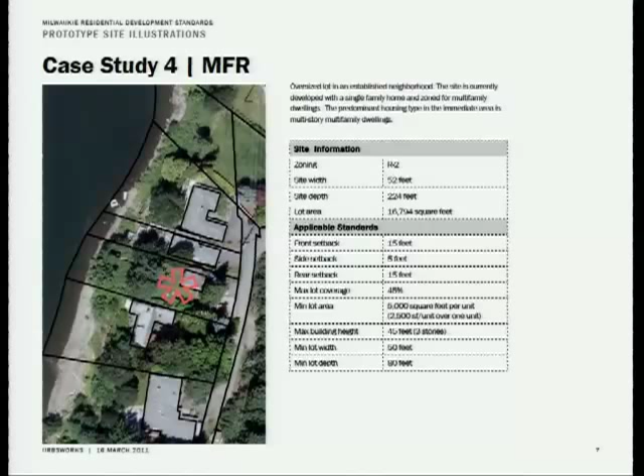The first part of the 4-part exercise was we showed what would happen under the existing code, and we modeled it in a very simple graphic way. We chose several sites subject to multifamily residential zoning right now. These were actual sites, but we attempted to genericize them a little bit so people wouldn't know it was their property. We laid out the zoning code standards, the setbacks, the heights, the FAR, and then we modeled that just to show people exactly what they might see on their neighboring property under this zoning.

Given that this is a community with a lot of multifamily zoning, it hasn't been taken advantage of. It was part of that wave of multifamily rezoning that happened in the 60s and 70s, and it mostly still has single-dwelling detached homes. So when people realized what the existing zoning code would allow, it was upsetting. But that was actually part of our strategy, to show that there needed to be more care, some amendments to their zoning code for multifamily dwelling.

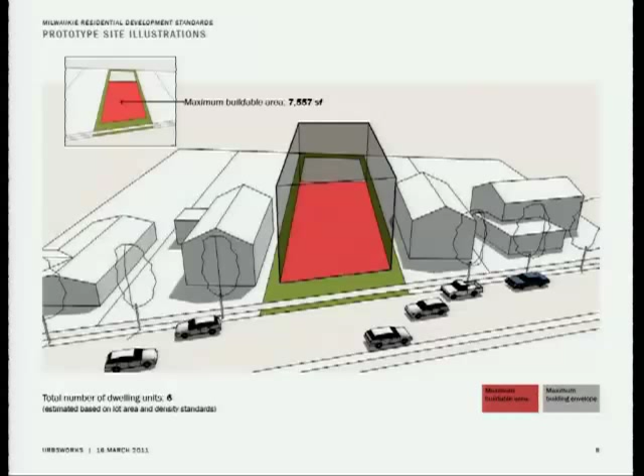And we did this on a number of sites. I'm just going to run through these quickly. You can see how big and bulky these developments are. One subtlety about the drawing is that the red, or salmon-colored area represents the maximum buildable area. But in the worst-case scenario, from a bulk perspective and incompatibility standpoint, there's nothing preventing the development from actually reaching into the back of the site area as well. That was something we wanted to make very clear. So the incompatible bulk and height, and perhaps the unrealistic setbacks, were all quite helpful for people to see.

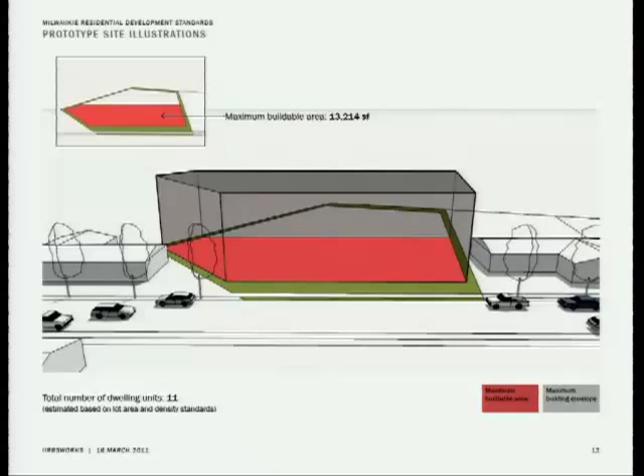So the second part of the exercise is we illustrated some alternative housing types. These are really housing types that have emerged over the last couple of decades. I think most of you are familiar with these, but a lot of people who think of multifamily housing zones think just of apartment buildings, stacked flats. They don't think about opportunities for row houses or cottage clusters or other newer options that new urbanists are actually quite good at designing and getting built.

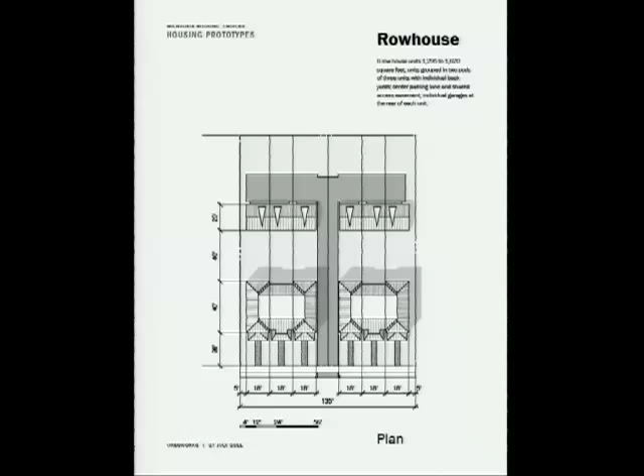So we took one of those subject sites that we had illustrated before, and then we showed what it would be like if we put row houses on it, and we were attempting to achieve the maximum density allowed, which was 8 units. The row house model didn't meet that, but that's kind of an issue with the row house model.

The cottage cluster, which is a new type of housing, there's a company out of Seattle, Washington called the Cottage Company, which has popularized a code model that's been adopted into codes by several Northwest cities, including Bainbridge Island, Whidbey Island, and parts of Seattle, and we wanted to take that model. It's a really easy to like kind of housing type. It generally doubles the density on a typical residential lot, but it does it in a way that is small and compatible with lots of green space. It's kind of for the apartment dweller, the person who might not want to live in an apartment, would rather have a garden, but wants a small house. These are generally required through the Cottage Company's model ordinance to be under 1,000 square feet.

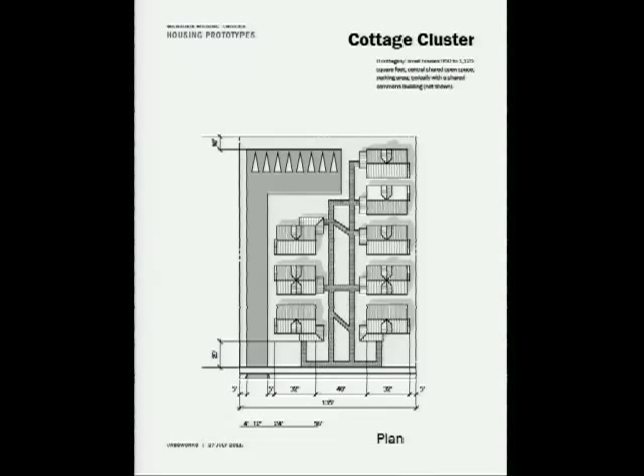So it can also be an affordable housing choice, but most of the developments that have been built are extremely expensive because they're very popular. So we modeled 8 units on that same site and showed what it would look like next to sample dwellings nearby. Then we did a so-called Milwaukie-type high-rise and modeled that.

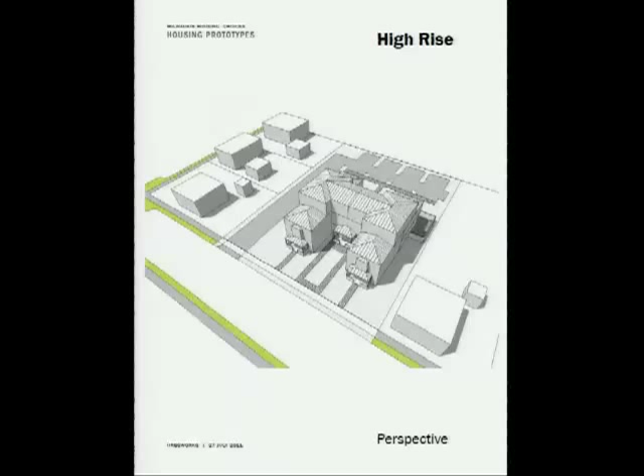This would be maybe your typical multi-dwelling apartment flat type building. And finally we did a smaller low-rise building, but one that had duplexes and larger, more like 2,000 square foot units stacked, but in pairs. So that was the second part of the exercise, modeling the ideal.

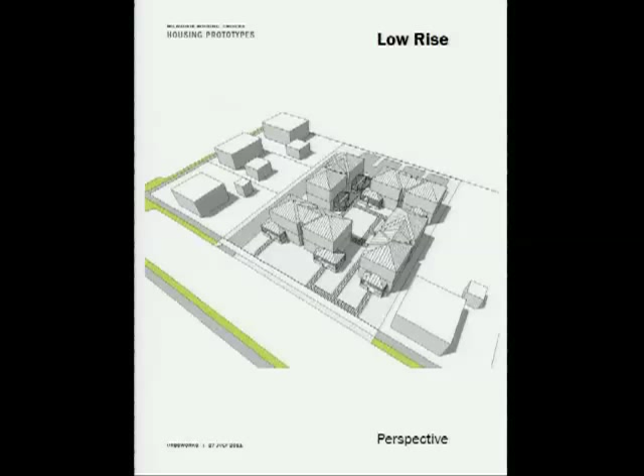The third part of the exercise was showing examples in the region that people could go visit. So we created a self-guided tour guide illustrated with addresses and photos, and sent people out. The Planning Commission actually organized a tour, and people went out on a bus and looked at some of these. We tried to select development from all over the region, not just Portland, because Portland is the center of the most progressive new development in the region, and most of the small cities chafe at being compared with Portland, or being asked to emulate Portland in any way.

So we tried to get as many of these units out in the outer areas, but to be honest, most of them do exist within the city of Portland. We cataloged them in several categories, from accessory dwelling units to duplexes to row houses and narrow lot houses, and the cottage cluster, which has several examples in the Portland area as well. And then we also had the garden courtyard, some of which are historic examples.

So the fourth exercise was a much more extensive effort by itself, where I conducted research on new demographic trends that support compact housing, and turned that into a series of slides that we could present at a community meeting to help people understand what compact housing really means, what accessory dwelling units look like, who tends to live in them, why they can be a benefit, what cottage clusters look like, et cetera, who lives in them and why they can be a benefit.

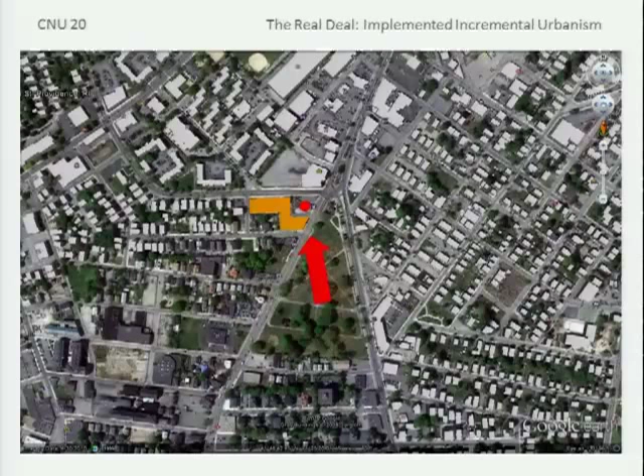Just to give you a sense of the tired site we inherited, there's a large cathedral church behind, but that's the gas station on the corner. I think the gray sky is mirrored by the kind of gray and depressing urbanism as well.

The site, just to do a quick basic analysis—which for the architects will be perfunctory, and for others may be interesting—there was retail or institutional frontage existing, fragmented, left on the street. Going down Arch Street, we had a residential scale, around 5,000 square foot lots of singles and two-families. That was mirrored again on Bridgham Street, but on the other side of Bridgham Street, over the years of urban renewal and various other things, there developed a kind of affordable townhouse scale. That's also mirrored by the fact that Bridgham Street is a much larger thoroughfare, so it has a different scale to it.

So our proposal was obviously going to respect the retail frontage on Elmwood. It was going to understand that you needed some sort of hyphen or transition between that and the residential scale behind it. And then this missing tooth over on Bridgham Street was another animal altogether.

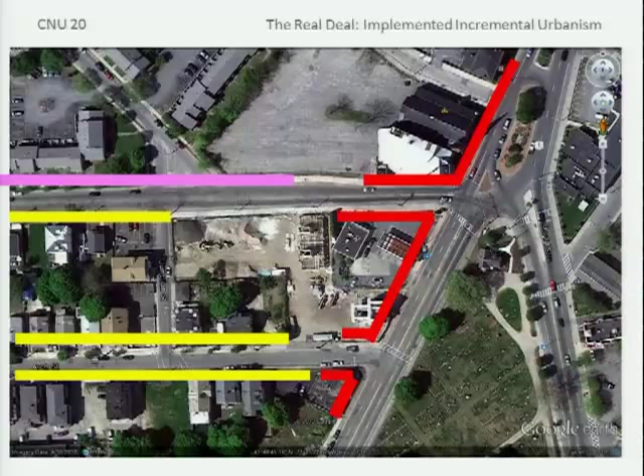Our original plan was just as literal as that—a number of pieces of building comprising different types: townhouses, apartment buildings, mixed-use buildings, and another group of townhouses.

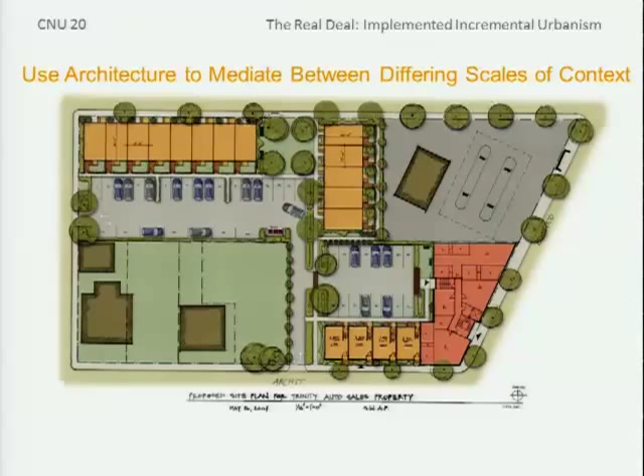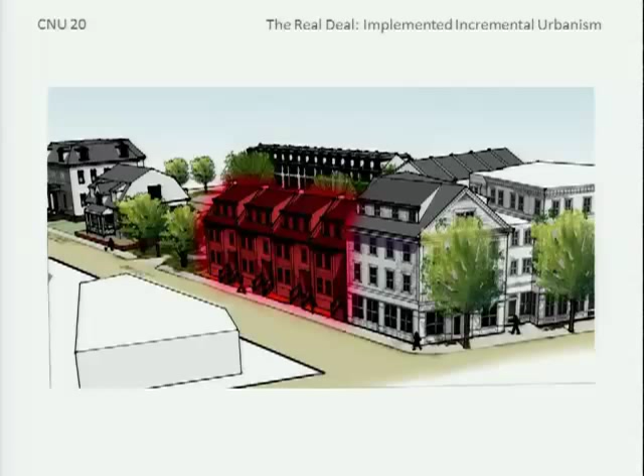We sold it in the public realm on the basic urbanism of using the infill to help knit together the neighborhood. So we talked about the scale being appropriate for retail on Elmwood Avenue, with buildings appropriately higher, notably higher than zoning allowed. But as we turned the corner and went down Arch Street, we would change in scale to a townhouse model that expressed each townhouse as a row house, blending into the existing character of the neighborhood as you went down.

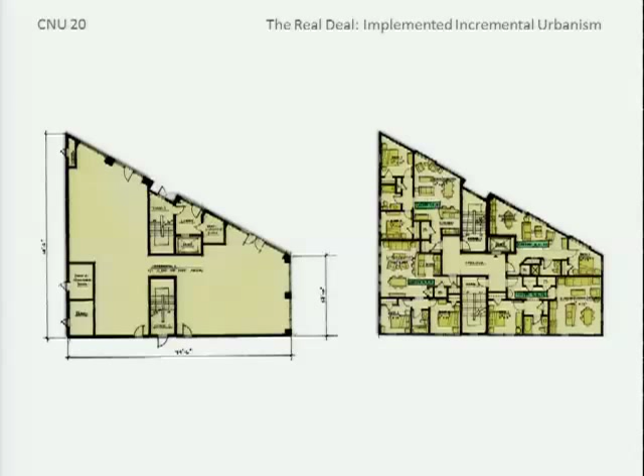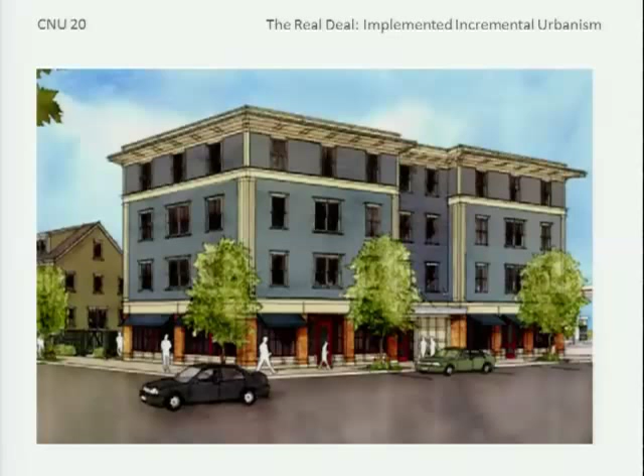As the proposal firmed up, those buildings became more clear. There was retail—a small amount, 3,500 square feet—on the main block, with an apartment building above it on 3 floors, 12 units, 4 units per floor. This was our proposal as we presented it in the public realm. The other type of building was a straight flat building, a walk-up flat, 3 stories.

All of this, by the way, I should digress and say the client here was a community development corporation, and because of that, it has its own opportunities and its own drawbacks.

The opportunity is that they're eligible for all sorts of funding and kind of virtual equity that a conventional developer can't get. The other side of that is you've got 15 different clients anytime you design a project, including everybody who's got even a nickel of money into it.

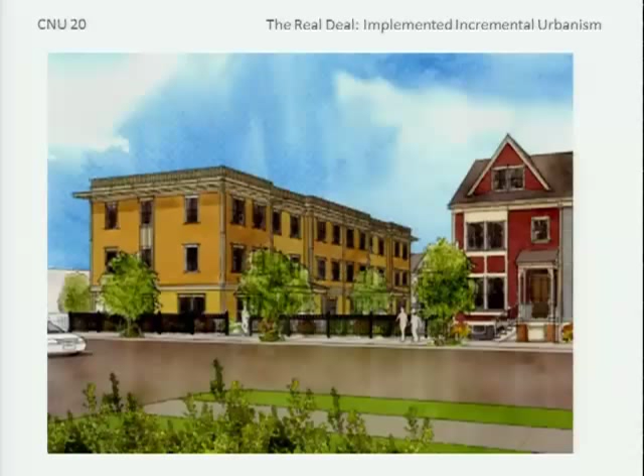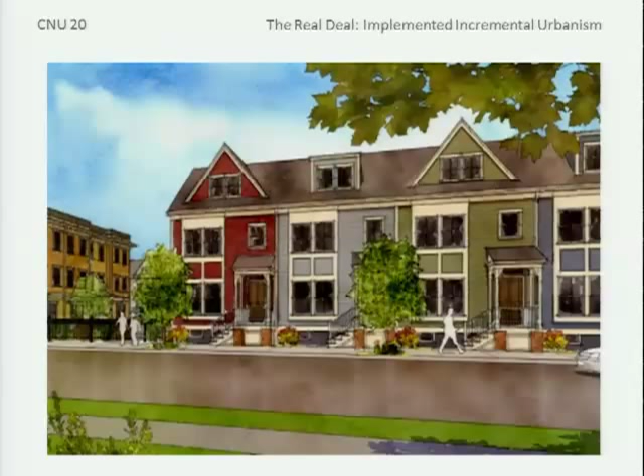These were all designed to be affordable at anywhere from 60% to 100% of area median income. The third type were townhouse buildings, and this is interesting because the townhouse units were meant to be for sale. This was one of the political decisions relative to permitting an affordable project. Many municipalities fear a largely rental, affordable project in their neighborhood. But if you introduce home ownership into the project through these townhouse forms, it leavens the mix a little bit, so people feel that home ownership context will make the whole development a little less threatening to the neighborhood.

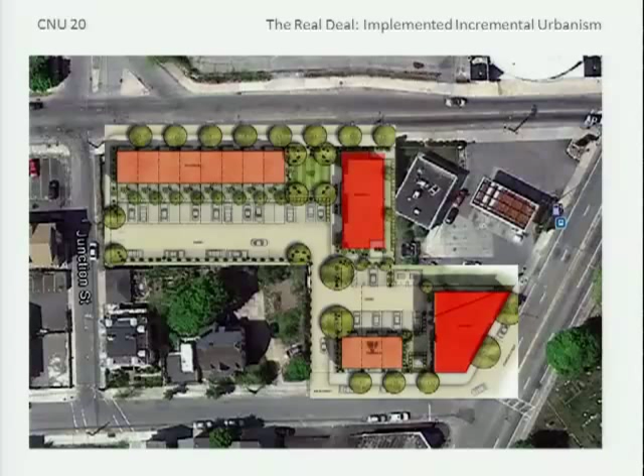As I said, these two units were apartment buildings, and they were funded completely through the low-income housing tax credit program. And that comes with all sorts of restrictions. It can only be rental.

One creative way we made the numbers work on this—I don't want to take credit for this, this was my client—was that where we had a small amount of retail built into it, that adds an additional funding source into the mix that can push these things just slightly over the line into being viable, into being an investment that people want to take for the tax credit.

So one message out of this project is the creative use of programming and the different funding sources that either are available because of that programming or restricted because of it, and mixing that alphabet soup together to get one package that works. Likewise, the market rate...

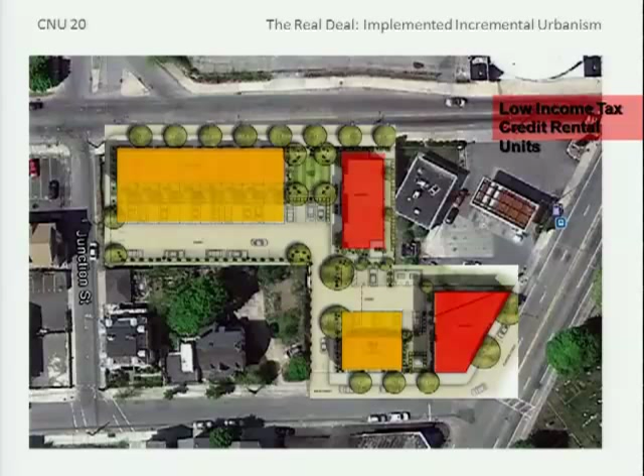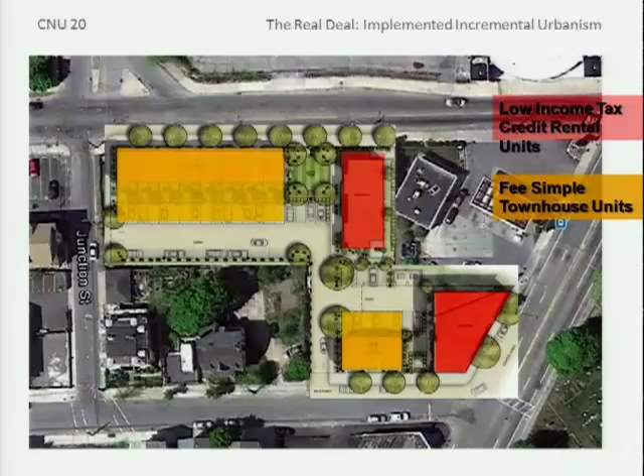townhouses were designed as fee simple lots, which is interesting because the city of Providence has no history of townhouse lots anywhere in it. When we proposed a series of lots for these townhouses that were 18 feet wide by 80 feet deep, a lot of people on the Planning Commission thought we were insane. We had to educate them that this is a common dimension in the Back Bay in Boston, and that the benefit of designing the lot to function as a fee simple lot would give them the opportunity to get home ownership into a neighborhood that would otherwise become largely absentee landlord rental units.

So, lessons learned: for maximum value, design beyond the largest context possible, and we always do that as a firm. We will design, we will take over anybody's lot who's anywhere near us and make a proposal for the next 50 years, whether they want us to or not.

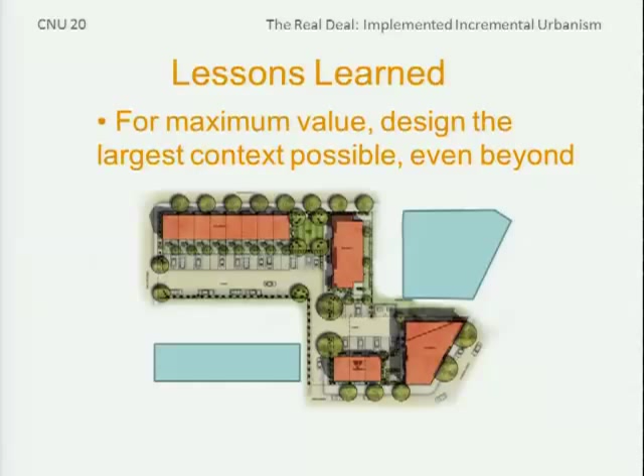But the benefit of that is you create value, you create a master plan that maybe you weren't commissioned to do, but it creates value for everybody around and ensures you don't miss opportunities as you're building out the project. The inverse of that is that even a single infill project should be considered in its smallest increment. To the extent you can break it down into small increments, you can get a finer and finer grain that responds better to the neighborhood urbanistically.

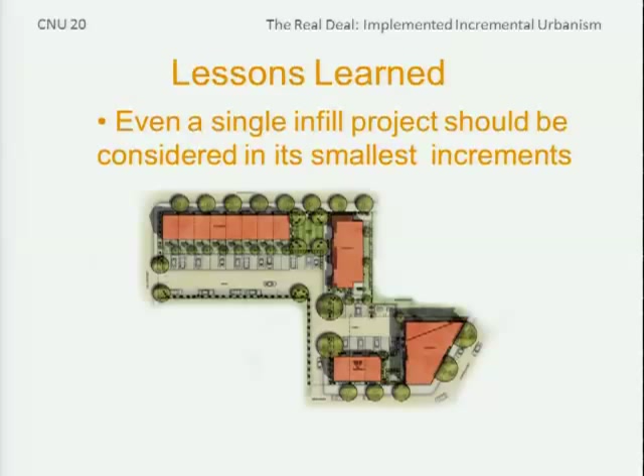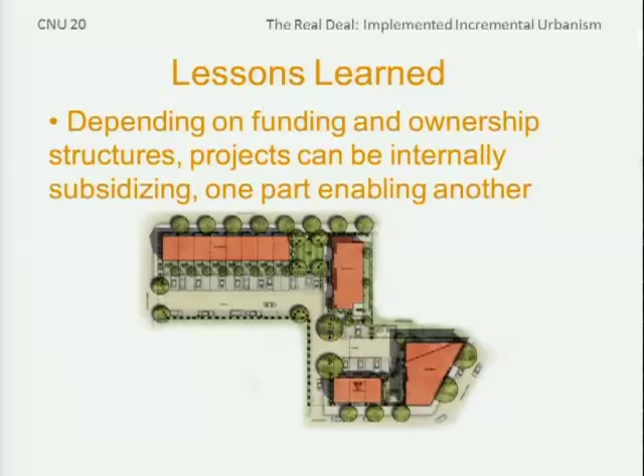And then finally, depending on the funding and ownership structures, projects can be internally subsidizing of one part, enabling the other. That's the issue of some of it being home ownership, some of it being low-income housing tax credit, and the one actually providing kind of basis for the other for the deal to work out.

The second project, and I'm not sure what my time frame is, but I'm sure you'll keep me honest, Sarah. Okay, this is a cottage neighborhood.

Marcy talked about this, the work they've been doing in the Northwest. This is an example in New England. It's in a town called East Greenwich, Rhode Island, which until recently was my hometown. It's an interesting town, and I think I'm going to walk you through it just because it's emblematic of towns all over the East Coast, and it serves very well as a model.

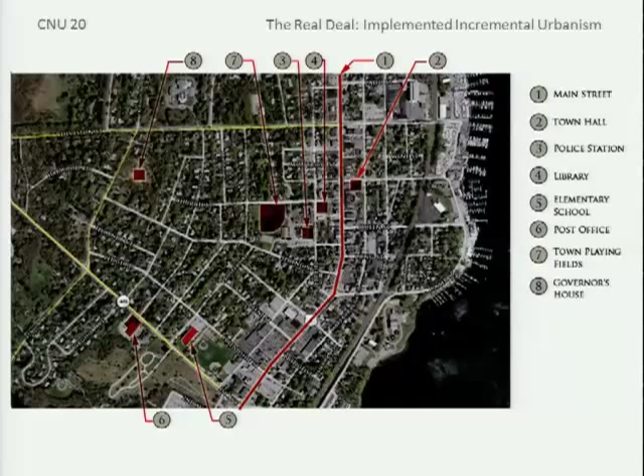There's the Main Street, which is really the Post Road, which runs from Maine to Florida. On that main street were located the town hall, the police station, the library, the elementary school, the post office, the town playing fields, even the governor's house within walking distance of that. In addition to that, there's Amtrak running parallel to it, and that's roughly true all the way up and down the East Coast. There's water access, which in times past was real transportation and now is just a recreational amenity.

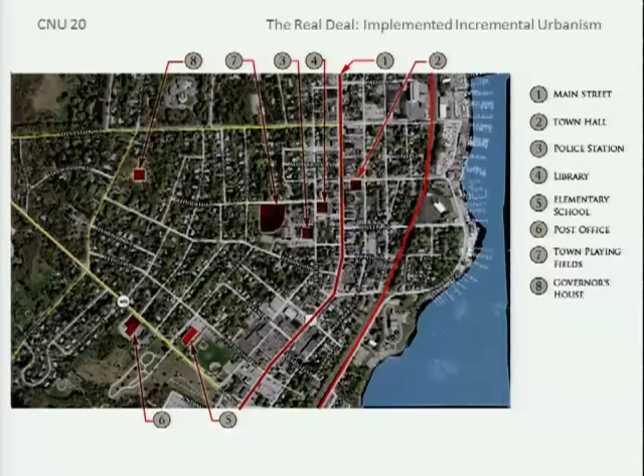The site is one block off of Main Street, in this hinge location between the commercial and the residential neighborhoods. You can see in this photo, Main Street being down there with a kind of commercial plaza, the back of which you're seeing right there, then the remnants of the neighborhood fabric with this existing cottage which was on the site.

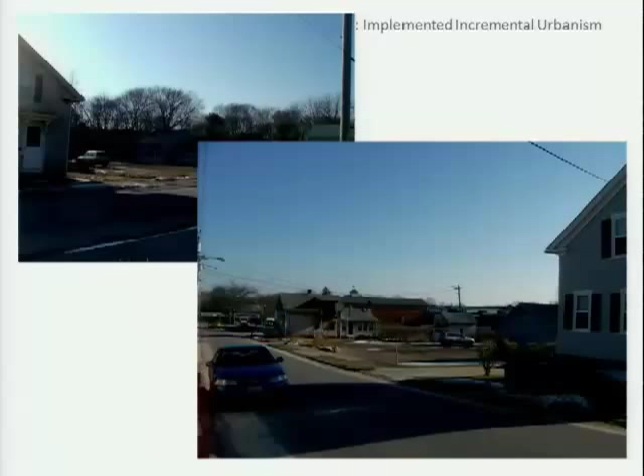This indicates one digression, the opportunity that this kind of site represents, because it exists everywhere from Maine to Florida, mostly in New England. There are all of these as the fabric of our retail life moved out to the interchange. What was left before was a slightly decanted Main Street, which is not as destroyed as everybody has the impression it was. There's all this great fabric there, but it's just housing a clock repair shop and a consignment shop. Well, that represents an opportunity to us, especially when you're talking about infill.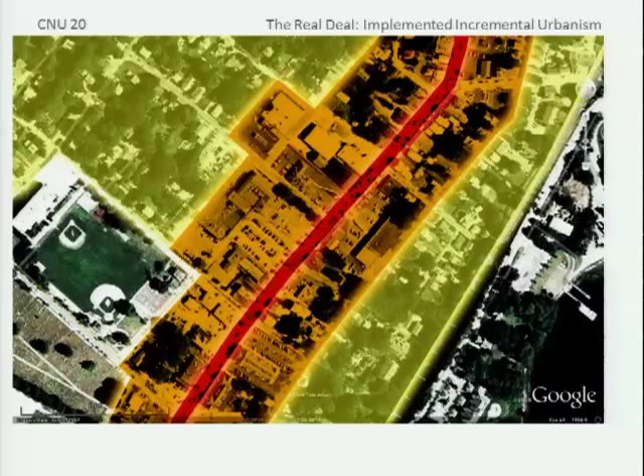I thought I'd just display that pattern a little more. Here again is the Post Road. This is typically in towns in Rhode Island and Massachusetts, there's one layer of commercial, and it very abruptly turns into small-scale residential. This site happens to occupy a hinge right between the two, which represents both an opportunity and a problem.

Again, this site being one where we saw the town had identified it as high-density residential. We saw that it was going to be a permitting problem, and so did everyone else. So we looked very closely at what different types of housing models could achieve the density that this thing was intended for, but also be permittable. Obviously all the old standbys come by of the workers' cottages of all various stripes all over the country, which become models for us to look at.

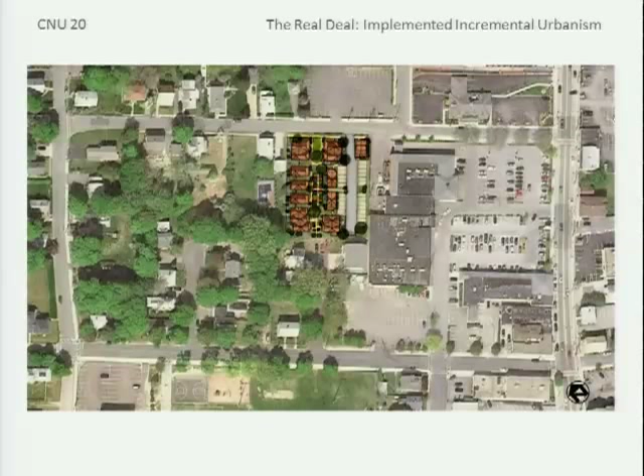So our proposal ended up with 15 units on a little under 1 acre, so about 16 units to the acre, arranged in a cottage court neighborhood with common gardens. We had a cutting garden in the front and a vegetable garden in the back, a formal green at the front. This is the existing cottage, common parking, and from the common parking you filter through along pathways to all the units.

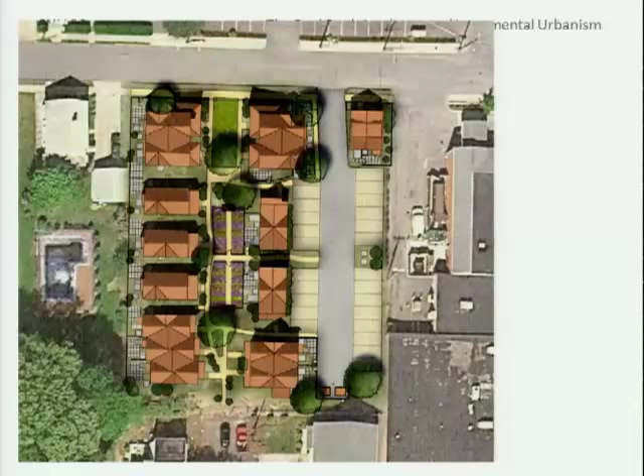The units are a mix of detached single families at about 850 square feet. They're tiny little units, and to be quite frank, they're probably too small for the market. We sold them all, but I think we did it in spite of the unit plans. They were not trying to be cute or cheeky or architecturally reconsider the vernacular. This is the vernacular of the workers' cottages that exist in this town, and we took it literally.

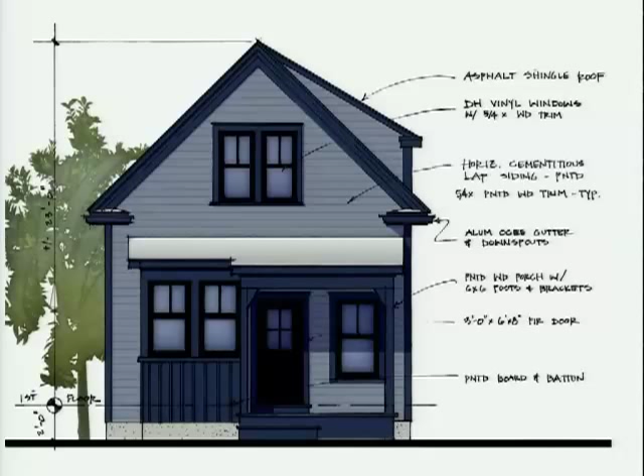A second type had all the bedrooms upstairs, and again, it's a very simple unit with all of the hard stuff of stairs and plumbing lined up against one wall so that you could create an opaque wall for the adjacent neighborhood, and then a simple living space in between.

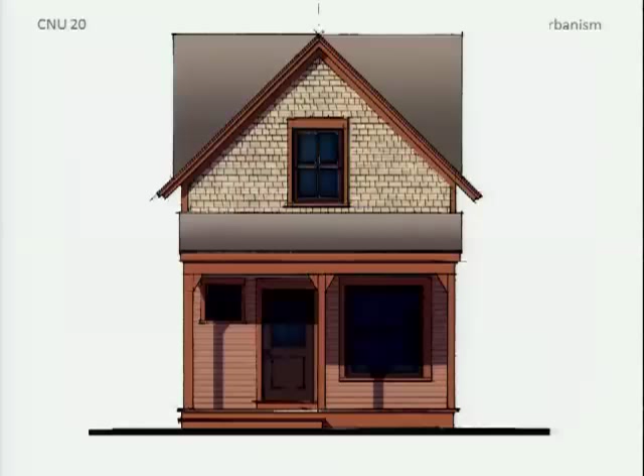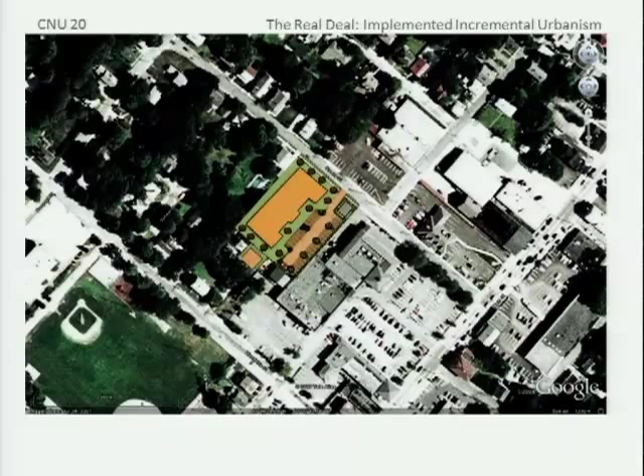In the permitting approval, we did much the way Marcy did in her context. We presented them with what their zoning suggested, and we did that right off the bat. We said, listen, you've identified this as high-density residential, and within your own zone, this is what you're proposing. We gave this design at the first public hearing and said, this is what your zoning is directing us to.

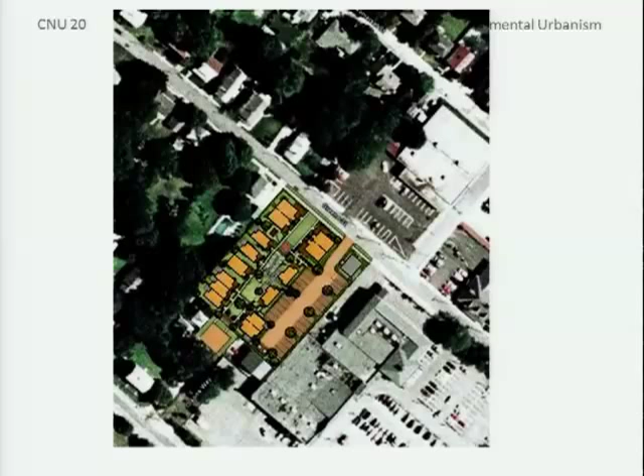But wouldn't you rather have something like this, where the largest element of the whole project is no larger than the abutters to the west? When we showed them this sequence of slides, we showed them this is the same number of units with the same amount of parking and the same amount of coverage, why would you make us jump through hoops to build this when we could build the other by right?

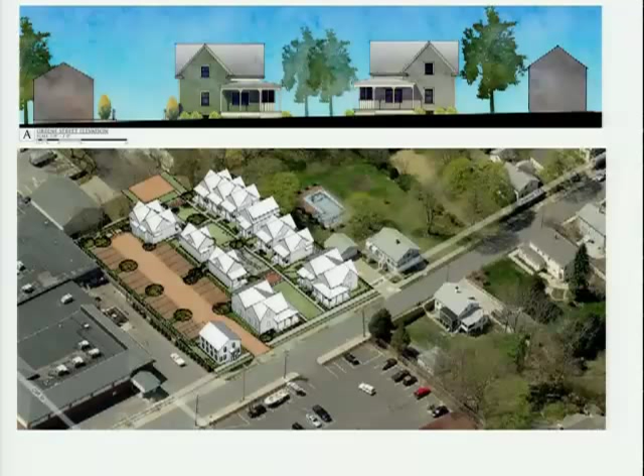That was an absolutely logical argument which defused any objection. We showed them that the frontage, as it affected the public realm, which is the area they should be concerned about, matched in scale, rhythm, and height. That fact alone made any objections go away, even from the abutter directly to the west of us, who stood up and said, that looks great, I'd love to have it next door.

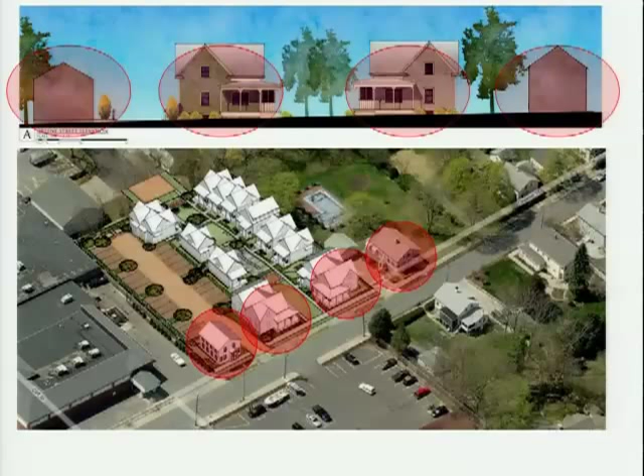One other point, and I would like to recognize John Ford from Morris Beacon, who's in the audience tonight. He did all of the site design, and it's just a digression to say that this is the kind of site design that we've gotten used to and we expect in a normal course of events.

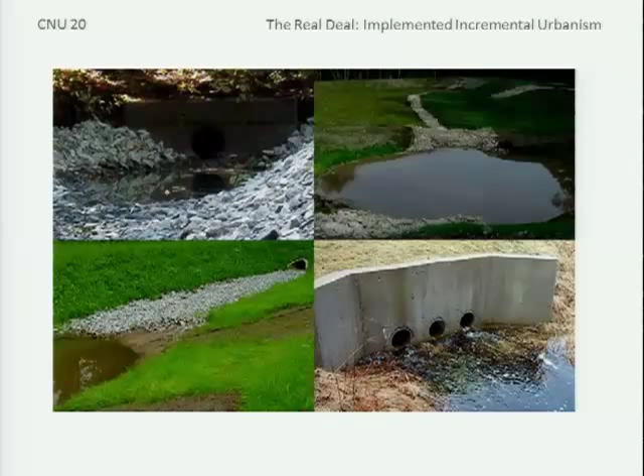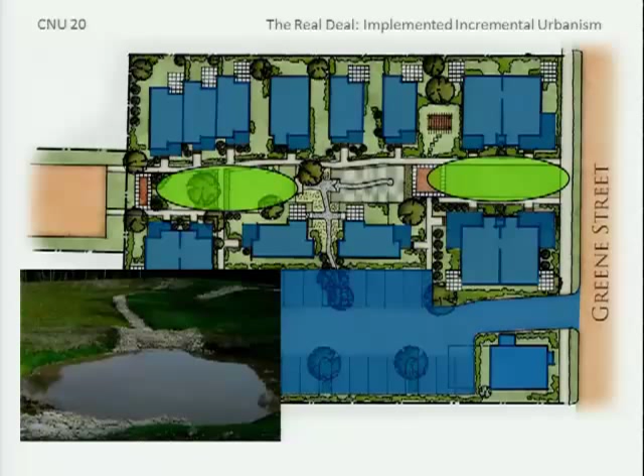In a project like this, we had a huge amount of impermeable surface, including the roofs and driveways, to deal with. In a normal course of events, the two green spaces would have been taken over by the civil engineer and turned into beautiful puddles like that.

What John suggested was that we take every available surface and do a system of infiltration and bioswale, and make the infrastructure actually part of the amenity for the neighborhood. So every condition where we had to create drainage, and we did it at a very micro level, is something that adds value and creates a landscape theme.

Even the points where that kind of approach creates conflicts become a little bridge for you to get over, from the walkway to the unit. You create a little walkway that goes over. I'm still waiting for a lot of the senior women to go off the edge of these things and break their hip, but so far that hasn't happened, and in the meantime it's very nice to look at.

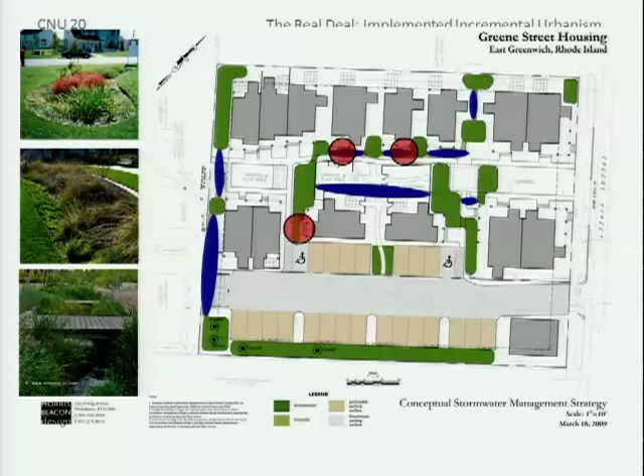Where we did in fact have to have some conventional structures, they were greatly minimized, and the overall cost was less than the conventional system. So I just wanted to show that.

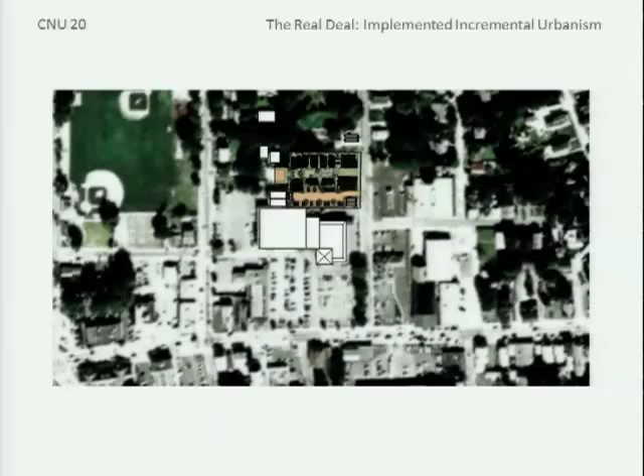Well, that was supposed to be a really cool animation, but it's not going to happen. So just some images to show you what it looks like now in its built condition.

We suffered. We came out of the ground exactly as the market tanked, or was really at its bottom in 2008, and we suffered like everybody else. So it only just sold out after turning over a couple of times. But relative to everything else in the area, it's been incredibly successful.

One other point, and I'm not going to go on to the third part, but I will make a point that when we were brought into this project, we actually inserted ourselves in this project. The developers had a previously abandoned commercial scheme for the site.

We had been introduced to this idea of cottages and approached them with a full-blown design and said, listen, this is what you should be doing, you should can that other commercial thing. And they said, great, that's a wonderful idea. What's your fee? And we said, our fee is X, but we also want to be partners in this.

We didn't know anything about being partners as developers, and we didn't do that because we wanted to get a cut of the pie. We did that because we recognized this was going to be a demonstration project, and we needed a place at the table to make sure it came off the way we intended, and the way we were selling it in public, that it was going to come off.

That really paid off in one way. It didn't pay off at all financially, but it paid off in that we kept a level of quality, and we were able to represent it to the public in a way that it actually was manifested. So I think there are a lot of lessons for this in infill. The design is one of them, but not least of which is just the architect or designer maintaining control throughout, because at these adjacencies and infill sites, you can't miss it. You can't get it wrong because you don't get another chance. There was one other point I was going to make, but I can't remember what it is. So thank you.

I always forget the most witty and brilliant comments, so I'm sure it would have been good. All right, and last but not least, Mr. Sharp, you're up.

My name is Rob Sharp. I'm an architect in Fayetteville, Arkansas. Sarah asked me to talk about this project we did called the Metro Building, and she asked that I share numbers and really go into more detail about the development process, how it works, and what the pitfalls could be. Can you hear me? So this project was a building that... sorry.

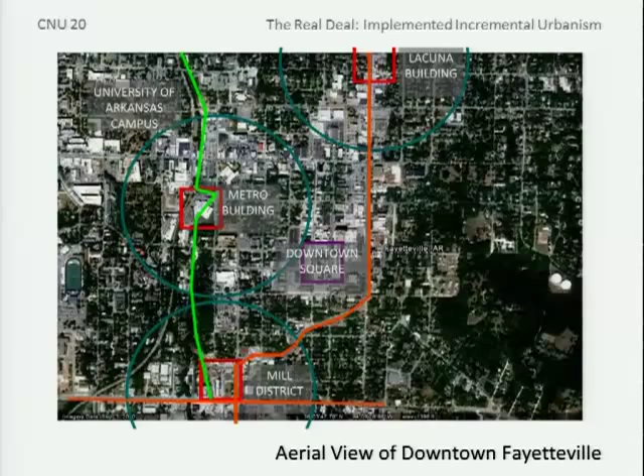It was an existing building that had started life as a place where they made fried chicken TV dinners. The trains would come up and load all the chickens off, come into the basement and come out, or come in the top and come out the basement. Anyway, it was a real hardcore industrial food processing facility. About 30 years ago, they closed down that process, and it became a storage building, a place for small, strange spaces that didn't need daylight or good access. It became this three-dimensional puzzle of odd spaces, and there was no maintenance done for a 30-year period, so the building slowly degenerated and the rents went down. One family owned it, and they finally ran it out to the end of its life, and then they had to sell the building.

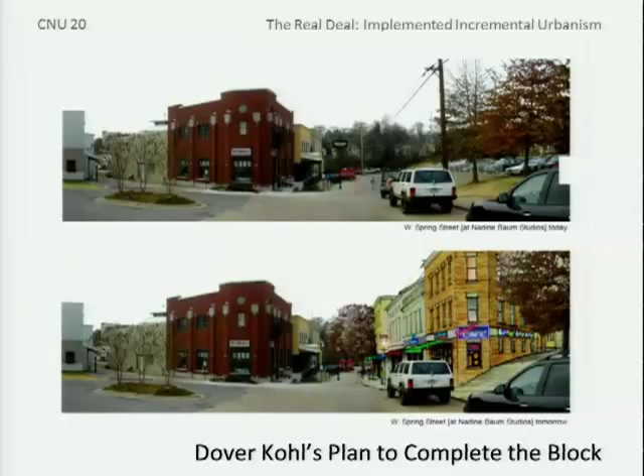This is the project team, and as you can see, it's a really flat project team. It's got one person, Brian Rondell, my client, in the polo sport shirt, and he is the developer. He's the only investor, the project manager, the project superintendent. And I forgot to add, he's also the leasing agent and does all the property management. When things got really rough, he did hire a part-time secretary to help him, but basically he did all this himself. Then I did the architecture, and we hired a few professionals as we needed them. The key thing is this direct and indirect relationship with the subcontractors.

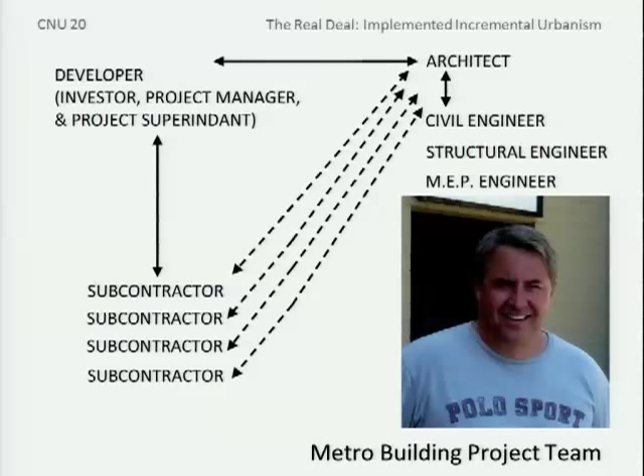I want to go through the timeline a little bit and talk about how it happened, because I think this is more than just a war story type project. I think it's a real good model for how people should think about developing today. First, I apologize for all this text—I know you want to see pretty pictures instead, but I want to get into some level of detail. The first thing he did: his business was printing T-shirts, and he had rented a space in the back of this building to print T-shirts for college kids, because when they have a party, they have to have a T-shirt to commemorate it.

So he had this place and was doing a good business with the T-shirts, and he heard the building was for sale. He was looking around for other space to move his T-shirt place, and he got the idea that he'd try to buy this building, because they were having problems selling it. The cost of the building was identical to the value of the land, but that didn't factor in the cost it would take to tear the building down, so it was difficult for someone to actually come up with the money for it.

Eventually he was able to work out a deal with the owners that they would finance him for a 30-year fixed rate with 10% down, and it was a $1 million purchase price. So it was real—he could go into the deal because he felt protected from interest rate swings, and he didn't have to come up with as much money out of pocket as for a traditional deal.

I think the reason the landlords were willing to sell him the building was because he was the one who always paid his rent on time without being asked, and so he built up a little bit of trust level.

The next thing he did was look at the building he had and made an analysis of who was in there. He had three categories: makes no sense, makes very little sense, and what he called the rest. An example of makes no sense: there was a welding place paying $2 a square foot, all utilities paid, so they probably had a negative utility bill.

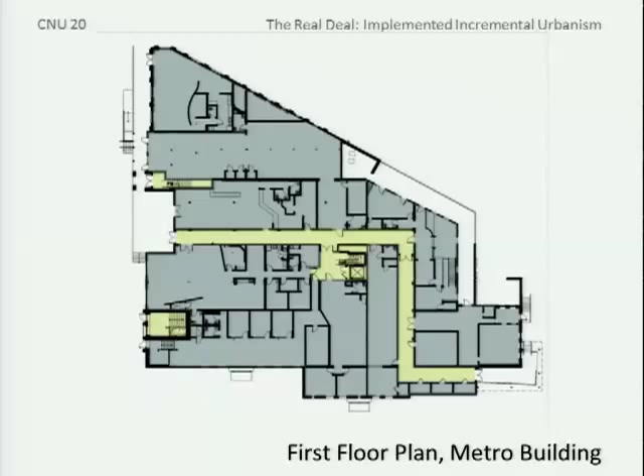These are the interior spaces that we created. We had so much space in the building, we felt we could oversize the corridors and hallways in order to provide some social areas, and also just to deal with the stigma of the building before.

We had these really narrow passageways and level changes. We invested in high-quality bathrooms and a nice leasing office, again, because those are the things that people were extra sensitive about because of the previous nature of the building.

We used a variety of exterior materials to, again, make the building more legible.